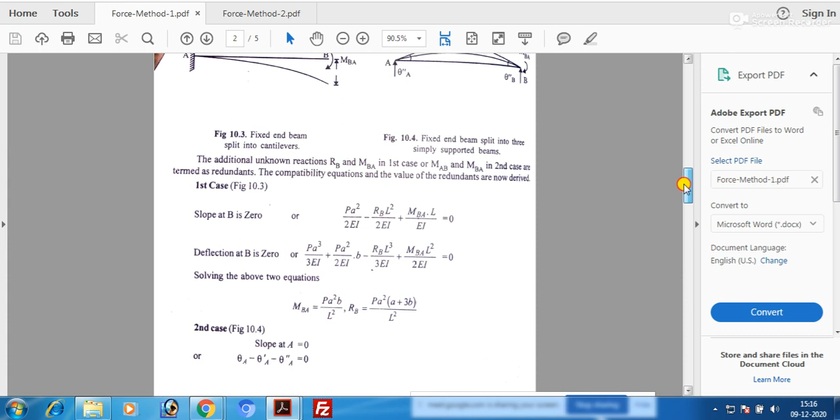So if you see this force method of analysis, force method 1.pdf, that is the first one. Please refer to this, page 459 - whatever you see here is not very clearly visible, it's not well scanned. I have given it in the next PDF, force method 2 PDF. This is the same one.

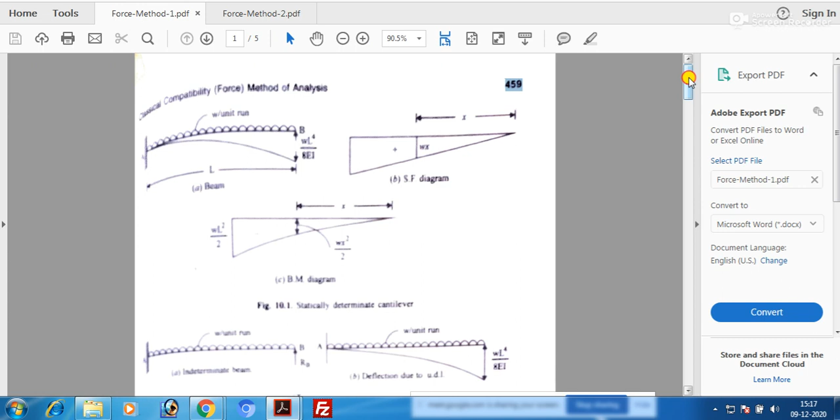So where should you start reading this PDF? Actually, you should first concentrate on this part - common beam displacements. You must remember these common beam displacements.

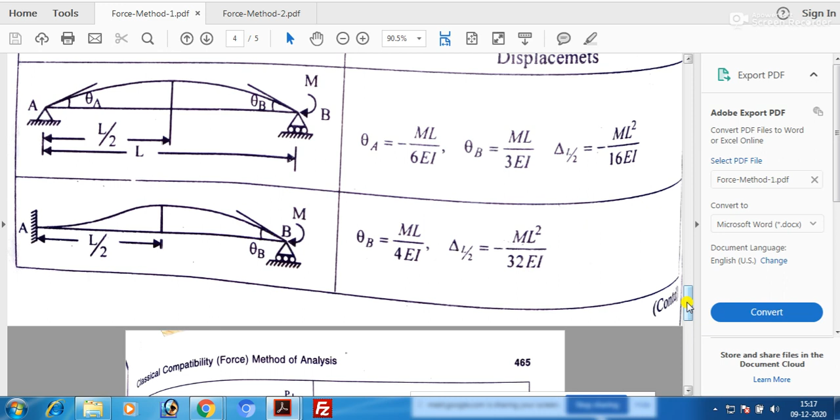So I have given you a chart from a book written by Roy and Chakrabarti. It's a very comprehensive kind of thing given in a tabular format. You should first try to see what is being said here.

So if you have a beam something like this, what kind of beam is this one? This is a simply supported beam. In a simply supported beam, at a particular end, if you provide a moment M, then what will be the rotation, what will be the angular rotation at support A and support B?

That you should remember, because in many cases you will be requiring it. So suppose you want to analyze a fixed beam, in that case you may be requiring these kind of values. You will have to remember what will be the displacement at a particular point of that beam because of this moment being applied, or external forces being applied.

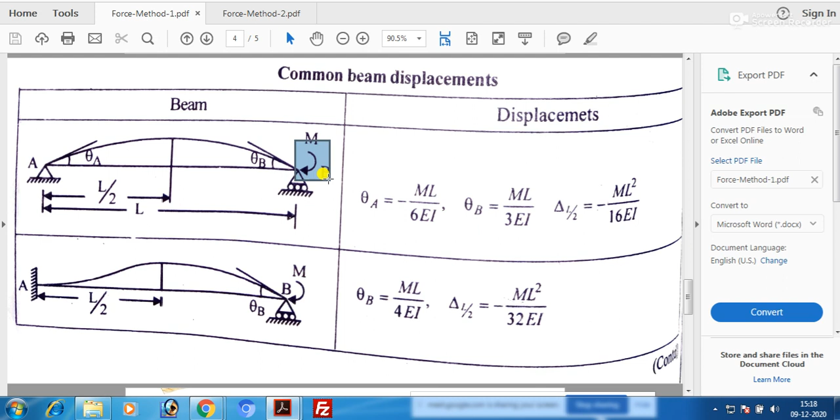So you see, this moment M, if you apply at point B, you are getting theta A equal to minus ML by 6EI, and theta B equal to ML by 3EI. You should understand this.

It is vice versa. That means suppose this moment you apply at A instead of B, then what will happen? In that case it will be just reverse. That means theta A will be ML by 3EI and theta B will be ML by 6EI.

Now the sign convention of theta A and theta B will all depend on you, how you are treating the rotation. If you think clockwise rotation should be positive, you put a positive sign. If you think anti-clockwise rotation should be positive, you put a positive sign. It's all up to you, but you will have to follow a completely similar convention throughout the problem. So either you take clockwise rotation as positive or anti-clockwise as positive, and either clockwise moment as positive or anti-clockwise as positive. It's all up to you.

Also you will have to find out the displacement at a particular or specific point. So when a moment is applied, at the middle of a simply supported beam, the moment diagram will be something like this. So at L by 2, this delta at L by 2, that is at the middle of the beam, is ML square by 16EI.

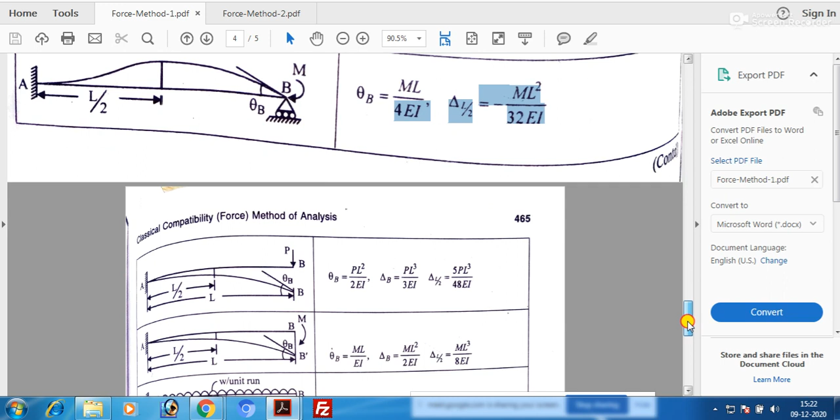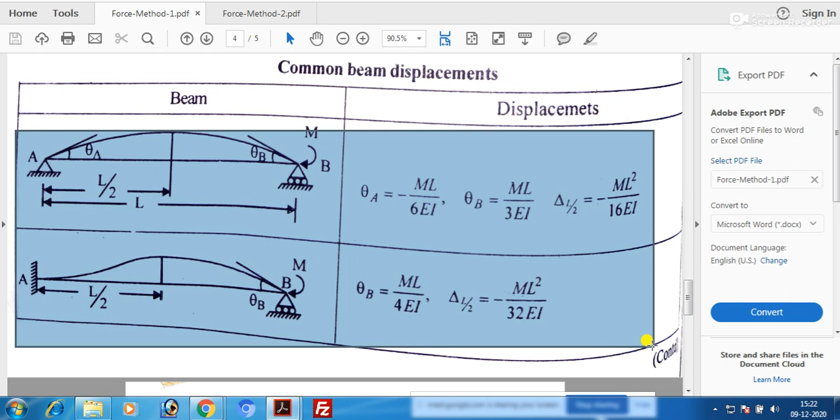Now these are very critical and typical cases. You must remember these values. In many cases you need these to be applied while solving the compatibility equations, or finding out the compatibility equation.

Now let us come to a very simple kind of structure. What is this? This is basically a cantilever beam. You must remember, if in a cantilever beam a P load is applied at the end, the displacement at the middle of the beam is 5 PL cube by 48EI. Displacement under the load, that is delta B, is PL cube by 3EI, and theta B is the rotation at B - there is no rotation at A.

So theta A will be also in this case equal to 0. And theta B will be equal to PL square by 2 EI.

So if you want to solve a problem of prop cantilever, as I was discussing in the previous class, you need to remember the cantilever displacements under different kinds of loads. When you take different kinds of loads, suppose a cantilever is subjected to a point load along with a uniformly distributed load and a moment, then what you will have to do is superimpose those. That means displacement due to a point load, displacement due to uniformly distributed load, and displacement due to moment need to be just added up to get the value of displacement at a particular point.

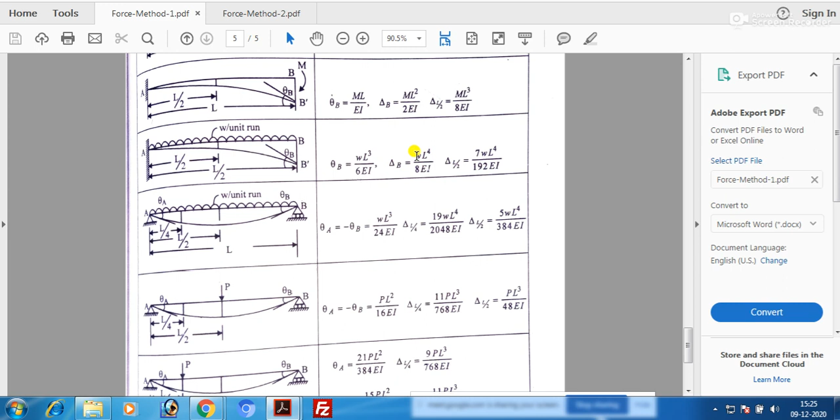Now if the cantilever beam is subjected to uniformly distributed load, W per unit run running along the beam, the value of delta B will be W, the load per unit run, into L to the power 4 by 8 EI. See the difference: when it is a point load, it is PL cube by 3 EI, whereas when it is uniformly distributed load, it is WL to the power 4 upon 8 EI.

At the middle, the deflection will be 7 WL to the power 4 by 192 EI, and theta B, the rotation, will be WL cube by 6 EI. All these values you should try to remember. In a single day you will not be able to remember it, but if you practice different kinds of problems, automatically you will be able to remember the values and correlate them among themselves, and you will be able to remember it very easily.

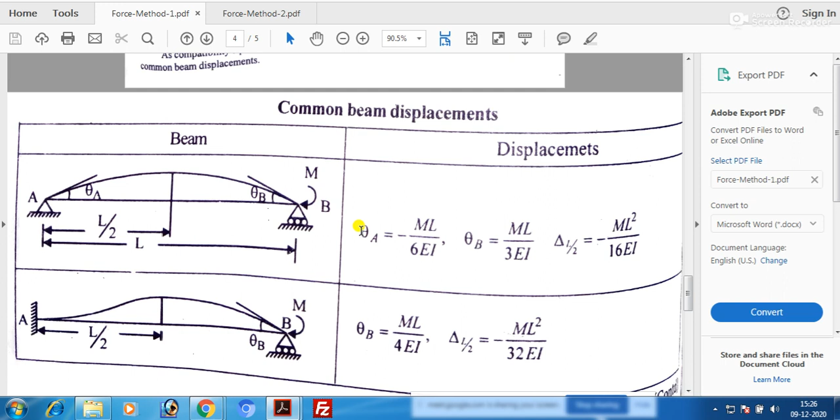Now this is a simple supported beam. What is the difference between the first one and the second one? In this case it is a simple supported beam, but it was being acted at one support by an external moment, so that is different from the previous one.

If you do not remember these values, I tell you that you will not be able to solve the compatibility method problems, because compatibility equations will be generated using these values of displacement. So displacement means either vertical displacement, horizontal displacement, or rotational displacement.

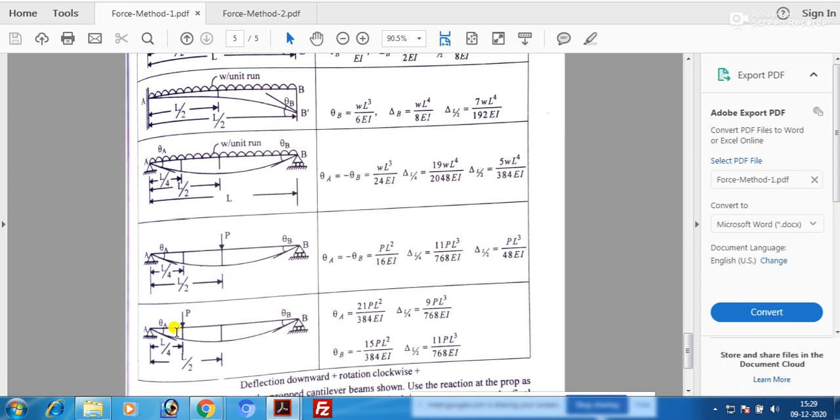Along with that, if you observe the other two cases, this one is a simply supported beam where a moment is being applied at the roller end, and this one is a kind of propped cantilever where a moment is being applied at the propped end.

So if you can remember all these values, you will be able to see that very easily you are forming the compatibility equation.

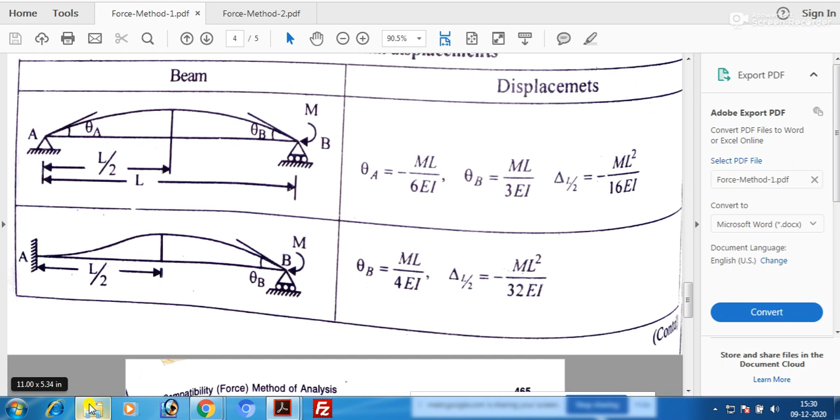So considering this guidance of these formulas, let us now try to see the step-by-step method of force method of analysis.

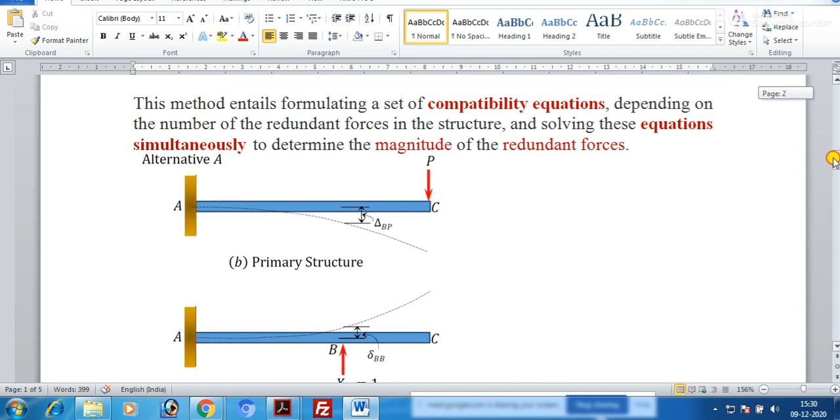If you see the step-by-step method, it is given something like this. First thing for analyzing any indeterminate structure using compatibility or force method, you will have to determine the degree of indeterminacy of the structure. So this is step 1.

After that, what do you have to do? Depending on the number of indeterminacy, it can be either external indeterminacy or internal indeterminacy. External indeterminacy means the reactions at the support—when we talk about reaction, it may be vertical reaction, horizontal reaction, or moment. So there are reactions, external reaction, and internal member forces.

So you find out first the indeterminacy, then you try to find out whether it is internally indeterminate or externally indeterminate. Depending on its indeterminacy, first you choose the redundants.

And what are the redundants? Redundants are nothing but the reactions which are unknown. That's what we have discussed, right?

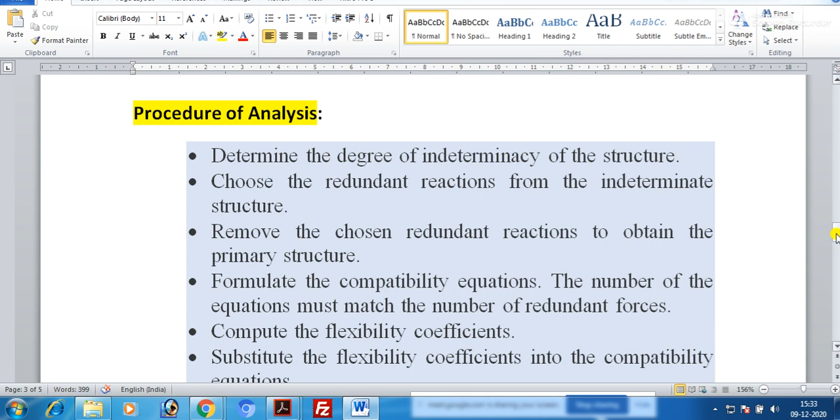So once you know your primary structure, what do you do? You subject your primary structure to different loads—the external load. Considering the external load, you find out the displacement at the point of the redundant.

Wherever point you have removed the redundant, at that point you try to find out the displacement, because of the external load which the structure is being subjected to. Now once you have done it with the external load, then you forget about the external load. Next, what do you do?

Take the primary structure again, and in that primary structure only apply the redundant forces. Applying the redundant forces at the same point, you try to find out the displacements. So the displacement at the point of the redundant forces should be equal to each other, because either they will not be moving or they will be rotating, or rotation will be equal to 0, something like that.

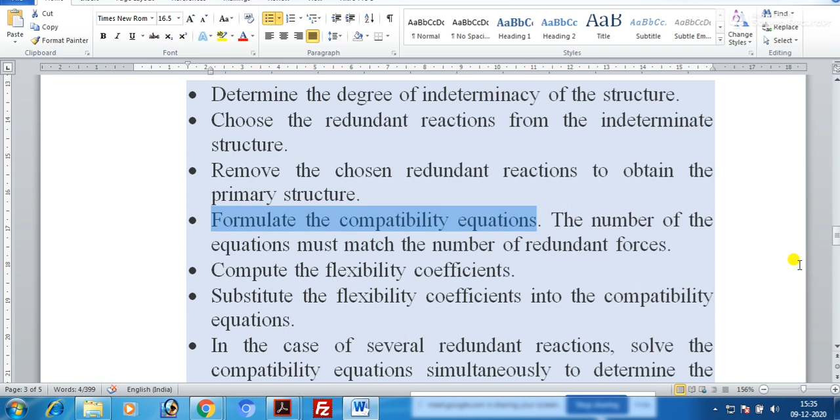That compatibility condition you will have to apply, and from that you should be able to formulate the compatibility equation. Once you have found out the compatibility equation, you should be able to find out the redundant forces from that. But you should remember that if you have one redundant in a structure, from one equation you should be able to find it very easily. But if you have multiple redundants in a structure, for each and every redundant you will have to formulate one compatibility equation.

So that compatibility equation, what you will be getting? You will actually be getting multiple simultaneous equations, and you will have to solve those simultaneous equations. One part of those equations will be called flexibility coefficients. So what is flexibility coefficient? If you remember solving simultaneous equations, you can easily solve using matrix method of analysis, or apply any method of analysis for solving simultaneous equations.

When it is 1 or 2 degree redundant, or 3 degree redundant, you can very easily use any method of finding it out. But if it is more than 3 degree redundant, more than 3 degree indeterminate, your number of redundant forces will be more, and your simultaneous equations will also be more. So in such cases, what will you have to do? You will have to formulate a matrix kind of equation, and then using matrix inversion technique you should solve the values of the redundant reactions.

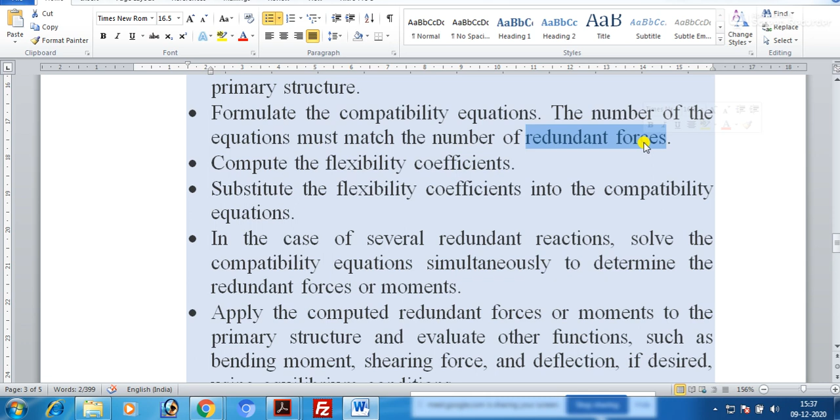So once you have got the redundant reactions, what will you have to do? In case of several redundant reactions, as I have explained, solve the compatibility equations simultaneously, and for solving these simultaneous equations you can use matrix equations and matrix method of analysis.

Once you have found out the redundant forces or moments, what you will do is apply the computed redundant forces or moments to the primary structure, because in the primary structure you have your original loads and you apply the redundant forces, since now you know the redundant force. So it is now known to you, and evaluate the other functions, meaning other reactions or other deflections such as bending moment, shearing force, deflection, whatever you want to find out.

Once you have found out your redundant, that means essentially the indeterminate structure has become a determinate structure. Once you have a determinate structure in your hand, you can apply equations of statics or equilibrium equations, that is sigma Fx equal to 0, sigma Fy equal to 0, sigma Mz equal to 0, and you can very easily solve for the other components of the structure.

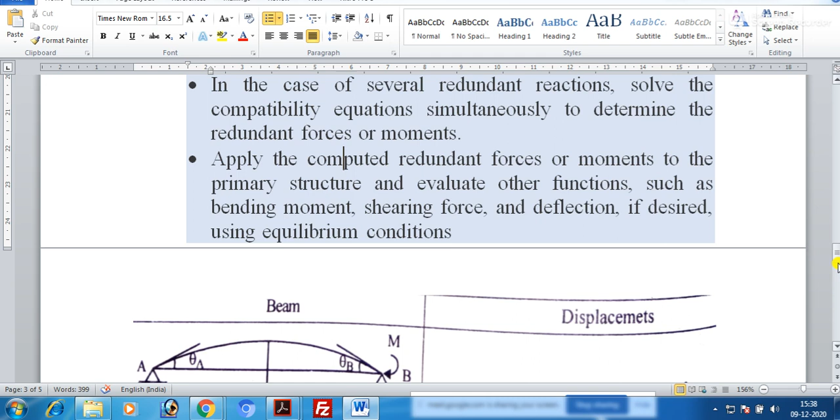Okay, so after understanding this method of analysis, we will take up one problem.

But before that, I ask you, is there any doubt up to this point? Tell me. Any doubt? No doubt?

No sir. Okay, so if you do not have doubt, then I just take one problem. See this one, so now you see this problem.

What is this? So you see, typically if you see this problem, this is a propped cantilever, right? This is a propped cantilever. I have taken this up previously also in the first class, where we discussed this propped cantilever analysis, how to find out the primary structure and other things.

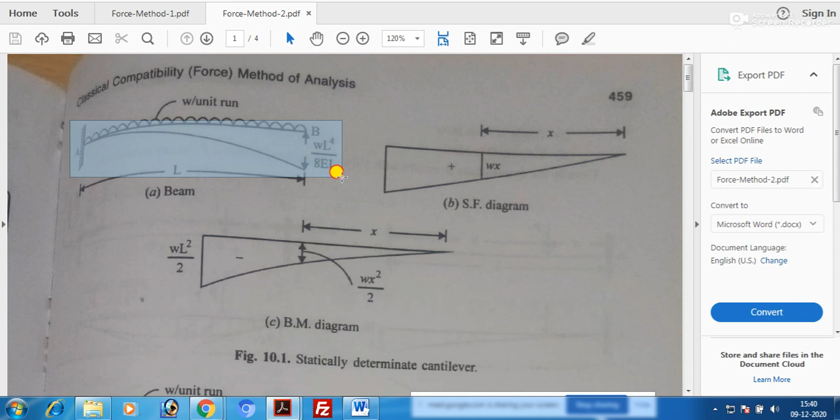If you take up this problem, you see this is typically, if you take this problem, what is this problem actually? Let's say this is your problem. In this problem you see a UDL is being acted on a propped cantilever. So once a UDL is acted on the propped cantilever of length L, then what will you have to do? If a UDL is acting on a propped cantilever, what will be your redundant?

First, before finding out the redundant, you must understand what is the first step. You must find out what will be the degree of indeterminacy, right? What will be the degree of indeterminacy? So you tell me now, what will be the degree of indeterminacy for this propped cantilever? Tell me, so if I take a propped cantilever, what will be the degree of indeterminacy? So what is a propped cantilever?

Indeterminacy will be 1. Where will it be? So how will you identify it?

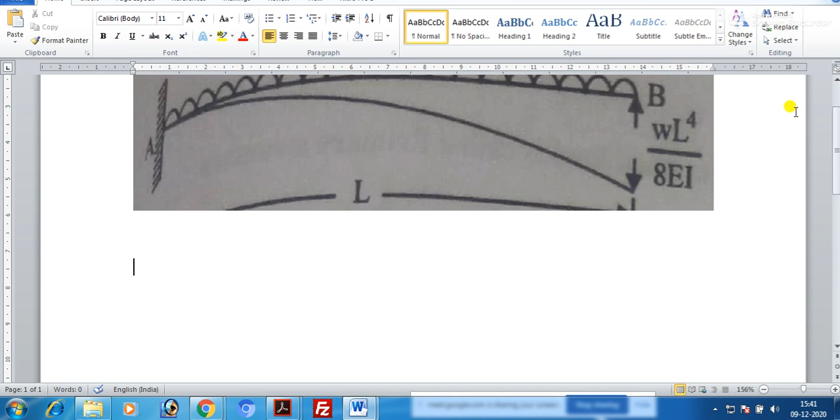See, there are two supports, one support is A, one support is B. At support A, what is it? It is a fixed support, right? So at the fixed support, how many reactions do you have? If you neglect the horizontal component of reactions, you have two reactions. So what are those two reactions?

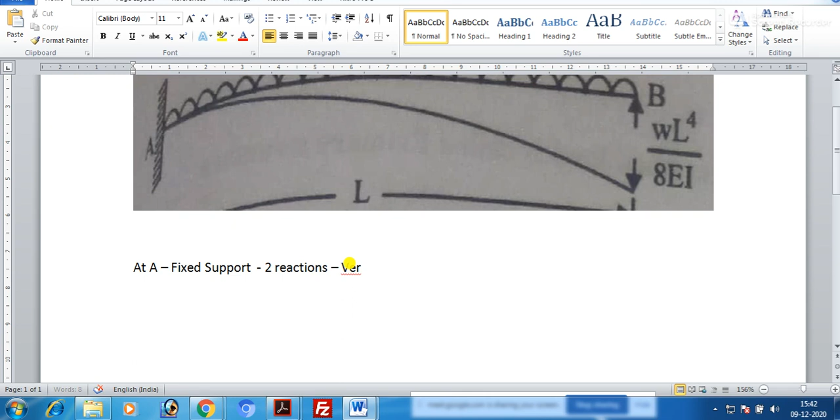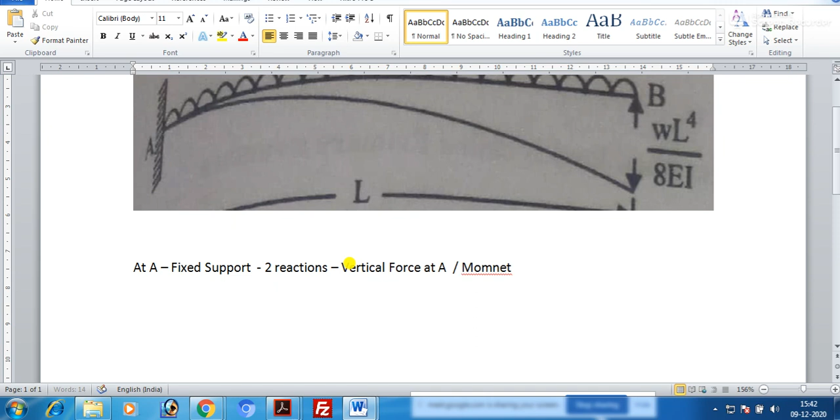One is vertical force at A, and the other one is Moment at A. So there are two reactions at A.

I am not considering the third one. Which one is the third one? Third one is the horizontal reaction at A. Why am I not considering it? Because this system is only subjected to a vertical force, that is W per unit run.

And what is the next thing? At B, what is the support? It is the prop end, right? At this point it is a prop end. So at B it is propped end. So when it is a propped end, which kind of support is there? Either it is a roller support or it may be a pin support. Both it can be, okay.

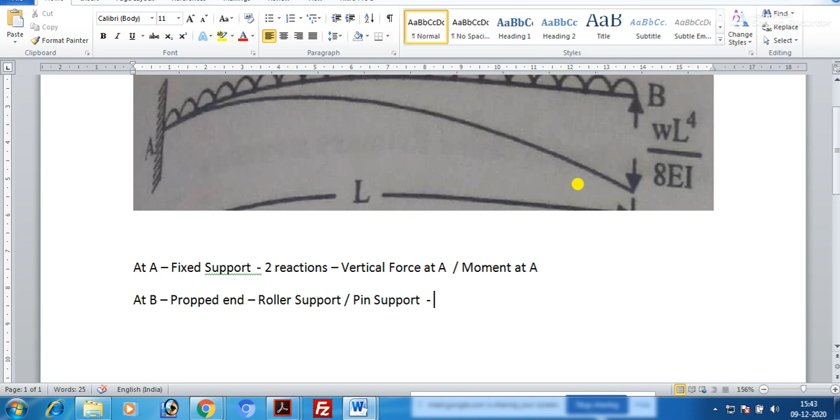So considering that there is no horizontal reaction happening, think about that because the system is acted upon only by vertical force. So which force will be coming in this case? The vertical force at B, correct? So how many unknowns do you have now?

So unknowns will be equal to two reactions here, and one reaction here, right? So 2 plus 1 is equal to 3. Now how many equations of equilibrium do you have?

Equation of equilibrium, don't confuse here. So in this case, equations of equilibrium we are having 2. Why? Because we have not considered the horizontal component of force. So the available equations from statics will be 2.

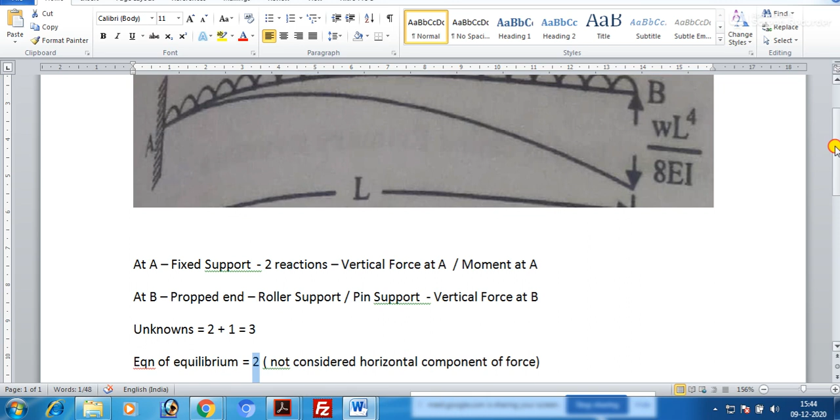What are they? Sigma Mz equal to 0, and summation of all forces in y direction equal to 0, that is sigma Fy equal to 0. So what will be degree of indeterminacy? So in this case, DOI will be 3 minus 2, which is equal to 1. So okay, fine, DOI is 1.

So the first step we have done. For analyzing a particular indeterminate structure using force method of analysis, first thing you will have to do is find out the degree of indeterminacy. So you have done it. Now the next step is to find out what is the redundant, right?

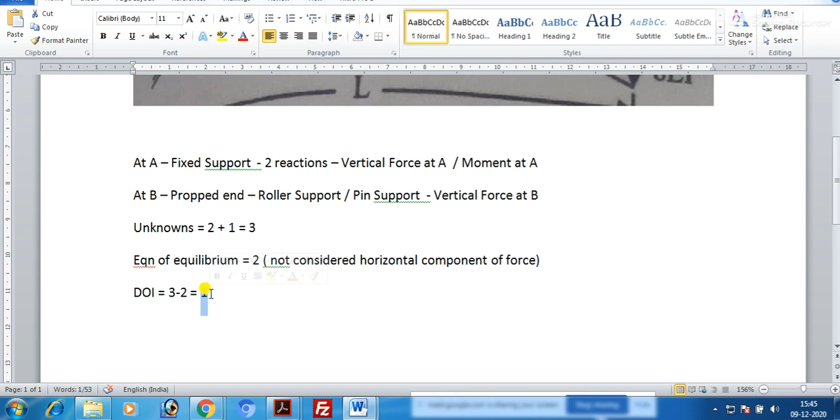So out of these forces, or out of this degree of indeterminacy, there is one redundant, right? Now you will have to choose the redundant properly. So once you choose your redundant properly, what is redundant?

Redundant means if you remove that force, the unknown force whatever you have in the structure, if you remove it, then what should be there? The structure should remain stable. So what can we do?

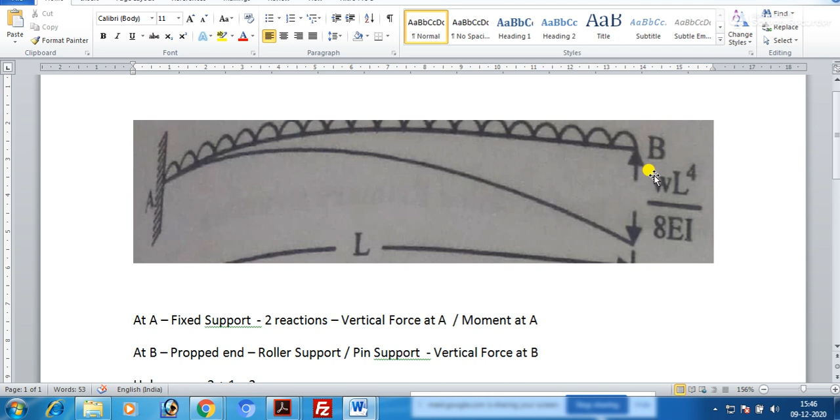If we remove this, that means if we remove the reaction at B from this structure, then what will happen? This propped cantilever will necessarily become a cantilever beam, right? And in that case it will become a cantilever beam.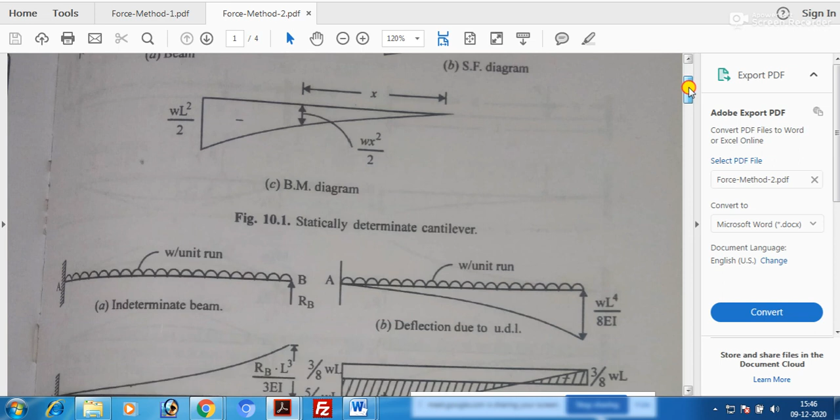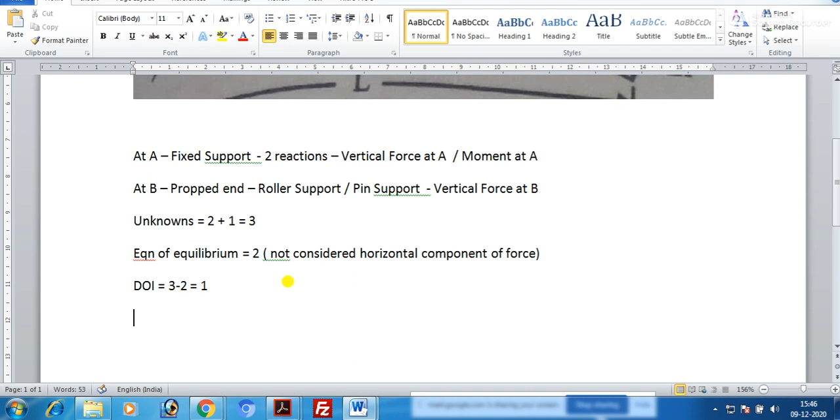So actually, you see, this one is an indeterminate beam. I'm again writing it from here. So you see, this is actually an indeterminate beam because this RB is over here. Now if I just remove this redundant, which one is redundant in this case? If I remove this RB, that is the redundant, then what will I get? I will get a primary structure, something like this.

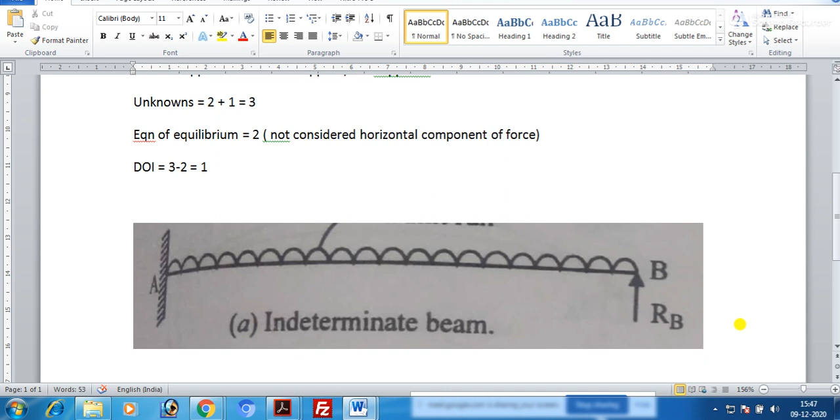So sorry, this is a cantilever beam. So actually what we are getting is purely... I think this figure will confuse you. Just a minute, let me adjust it a little bit.

Now it should be clear. You see, there is no reaction at this point. So what we have done is we have removed this redundant. And what is this redundant? This redundant in this case is RB.

Now if I remove this, you see this structure necessarily remains a stable structure, and this is necessarily a cantilever beam. This structure we will call the primary structure. So we have removed the redundant, and we have seen what is the primary structure.

Now after this, what is the third step? Second step is also done. Now after you have your primary structure, what will you have to do? So at the point of the redundant - what is the point of redundant over here? Redundant point is over here.

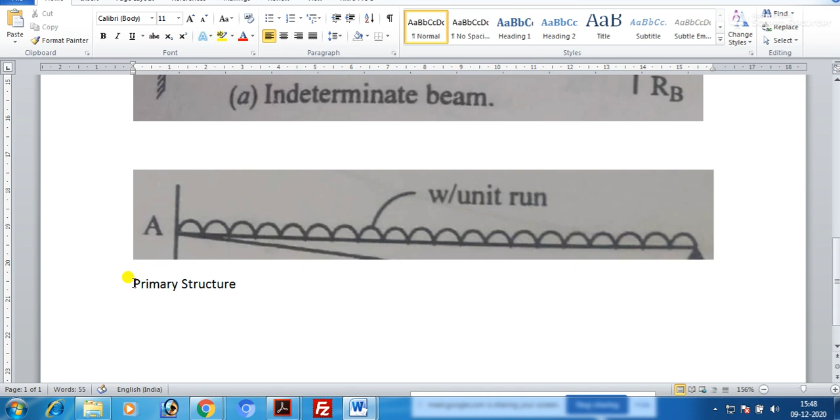So at the point of the redundant, you find out displacement in the primary structure, at B. And what is B? B is the position of the redundant. So at the position of the redundant, you now have to find out what is the displacement.

Now you tell me, what will be the displacement at this point? Can anyone tell? WL cube by 3EI, WL cube by 3EI.

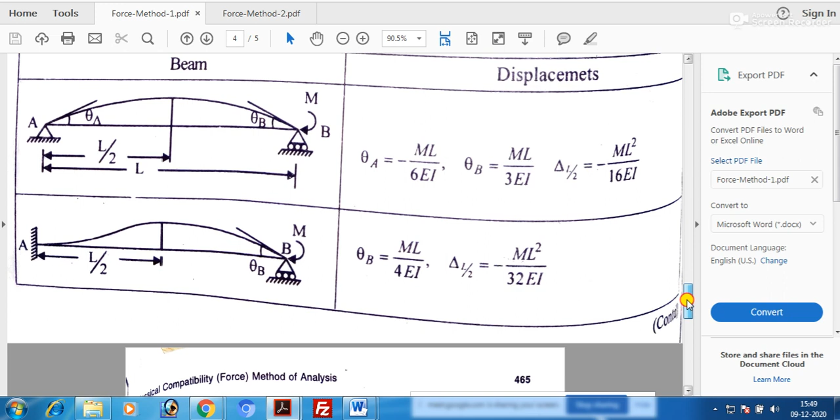Okay, let's see - that is where you will be requiring this diagram. You see, now what are you having? You are having a cantilever beam subjected to uniformly distributed load, and at point B you will have to find out the displacement. So the value you said is not correct.

WL cube by 3EI is the case when a cantilever beam is subjected to a point load at the end. When it is subjected to UDL, it is not WL cube by 3EI, it is WL to the power 4 upon 8EI. Okay, WL to the power 4 upon 8EI.

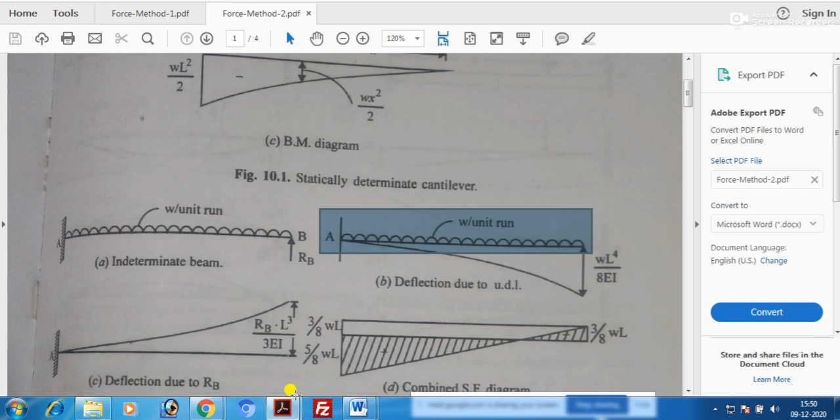Okay, so what will be the displacement? Let us write over here. So delta, I am writing it like this - delta B. So delta B will be equal to how much? So what should I write? W... WL to the power 4 by 8EI. You see this value - WL to the power 4 by 8EI.

Now you understand how these diagrams are important, how this chart is important. So all these values you should remember. I will take up problems one by one and you will understand why you should remember all these values.

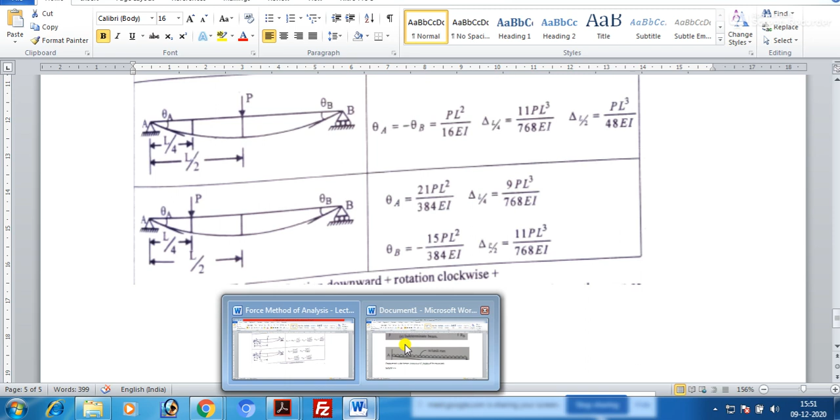Okay, so for this first problem, you need to remember this, and you will get the value WL to the power 4 upon 8EI. What is E and what is I? E is the modulus of elasticity and I is the moment of inertia of the beam. So EI is basically called flexural rigidity, right?

So you have seen what is delta B. Now what is this delta B? Delta B is nothing but the displacement at B due to this load, the external load acting on the structure.

Now you see, in the next case what will happen? When you take this load out from the structure, as I was telling you, if you just consider only the structure subjected to a point load over here, what is the point load in this case?

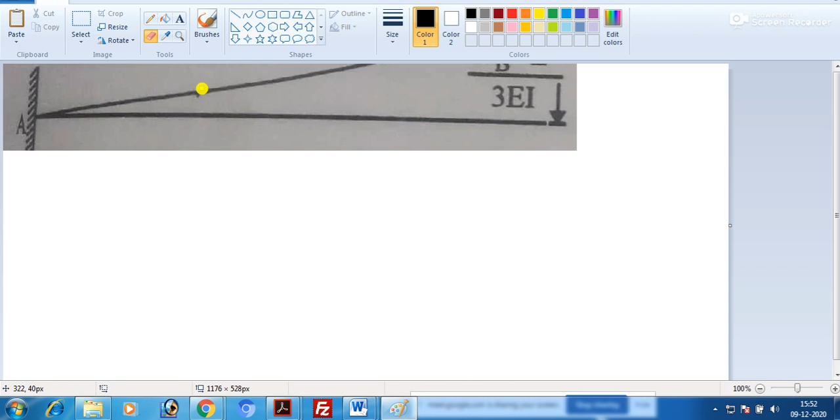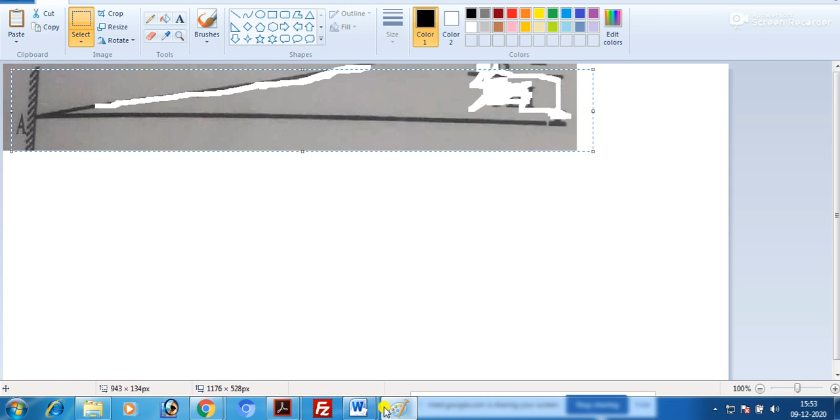So suppose I take the structure - rather I'll just take a paint and do it, otherwise it will be confusing. Let me remove this first. So just take it and remove it. Also remove this. So if I remove everything, what you are basically getting is a cantilever beam. So forget about all these loads, okay.

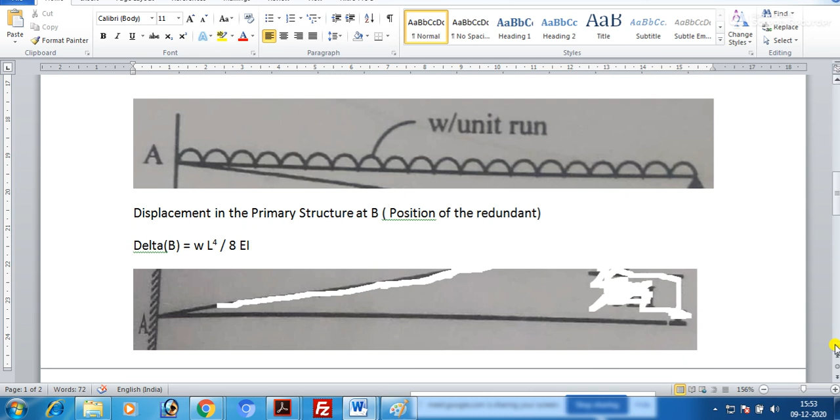Now in this beam, what will be the next step? In this beam, you should be applying your redundant force. So what is your redundant force over here? This is your redundant force, okay. So at the end, if you apply your redundant force - let me change the color.

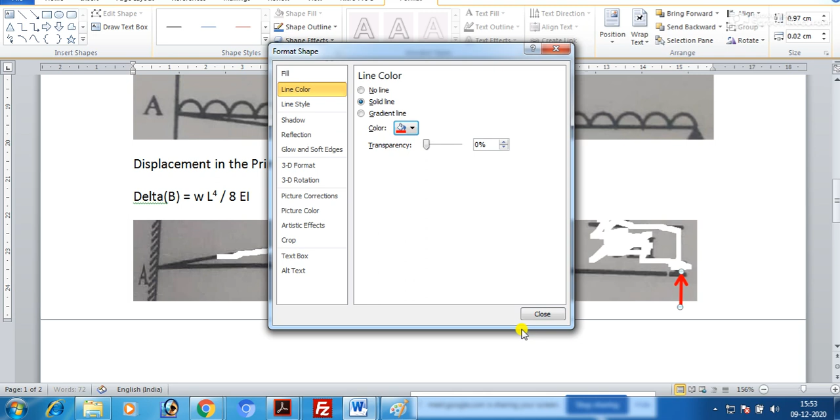So if you apply the redundant force, what is this redundant force? It is nothing but the reaction at B at the prop end. Because of this redundant, suppose its value is RB. RB is nothing but a point load acting on a cantilever from the below end. So what will it do? It will just displace the structure in the upward direction.

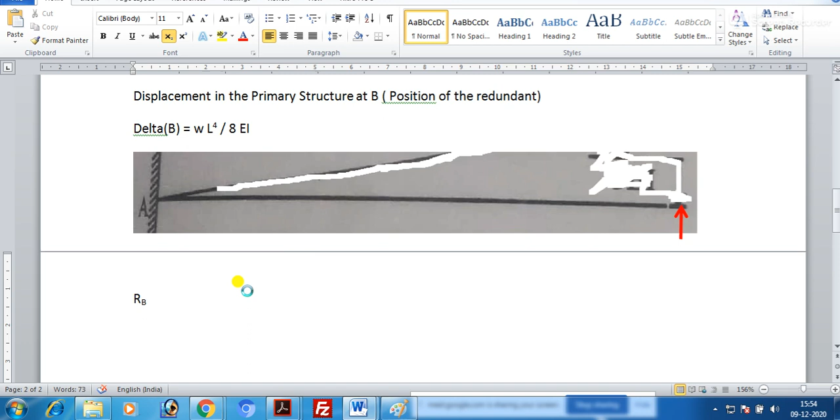So you will find a deflection of the structure similar to this kind, a displacement similar to this. Let me draw it again here. Because of this RB, when it is applied, it will deflect the structure upward. And what will be the displacement?

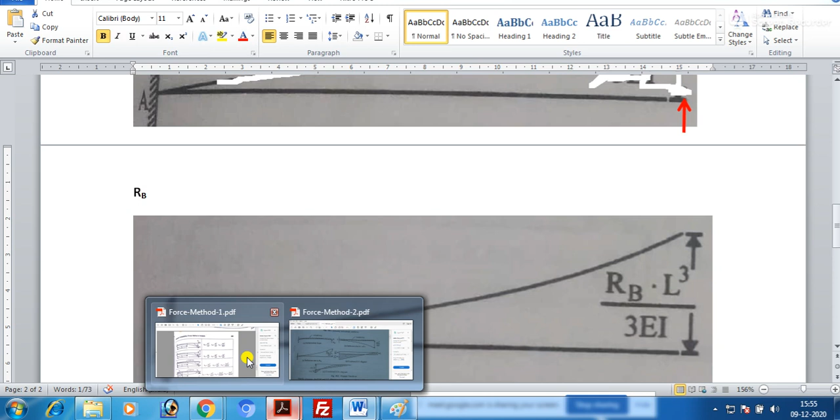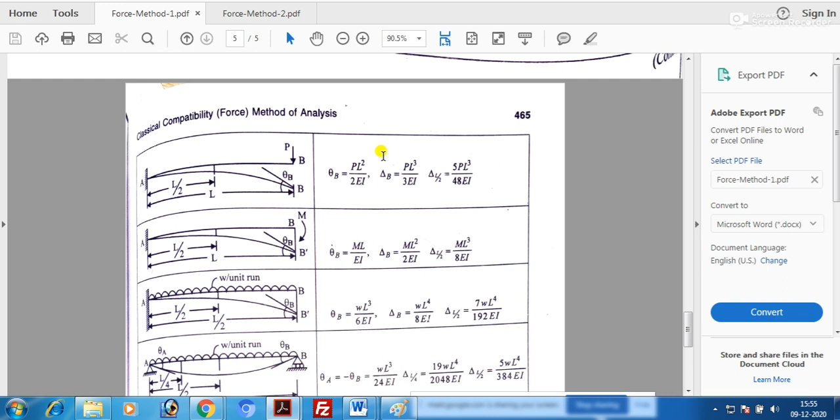Now again you will have to go back to here. Someone has told that delta B, because of this P, is PL cube by 3EI. So because of this RB, now we will be getting a displacement over here, that is RB into L cube by 3EI. In this case, this P is being replaced with RB, isn't it?

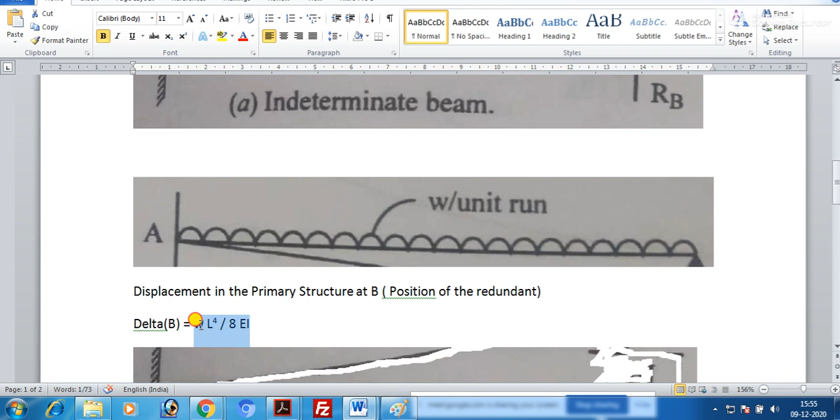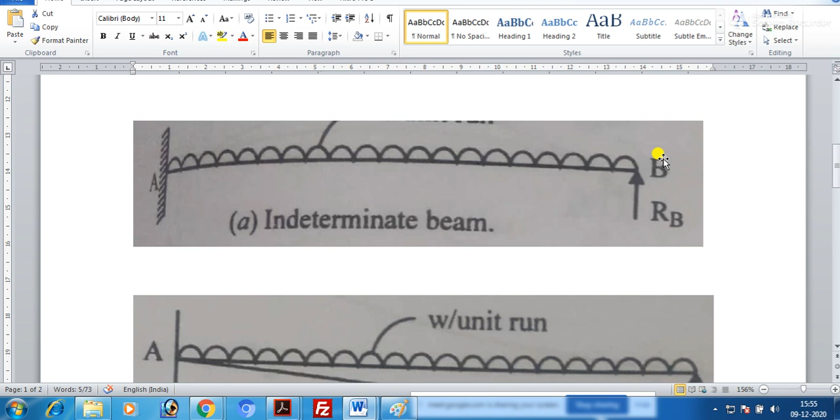So now, from these two conditions, once you have got this delta B, at this prop end ideally there will not be any displacement. Ideally it should not be any displacement. That means the downward displacement should be equal to the upward displacement. So what can I write?

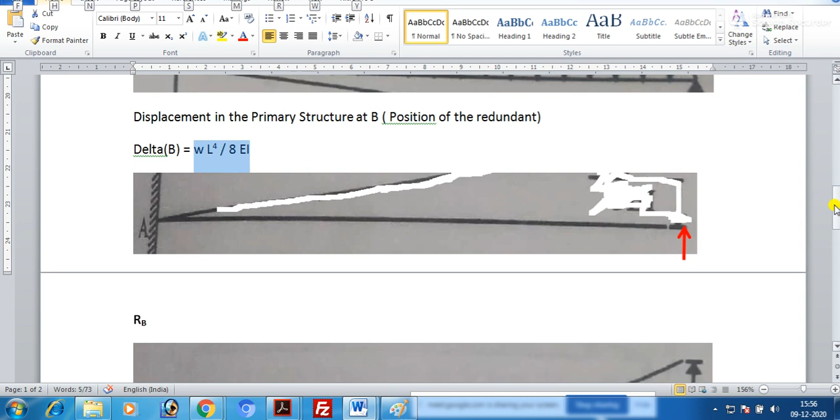I can write it, let me take it from the top. So what I can write, I can write this one, right?

This is downward. If I take this displacement as positive, then this displacement which is upward, I can take it as negative. So this minus RB into L cube divided by 3EI, this should be equal to how much?

Tell me, how much should the value be equal to? Zero, sir. Zero, yes, absolutely. It will be zero because at the point of the prop end, the upward deflection due to the redundant on the primary structure, and the downward deflection due to the external load on the primary structure, should be the same.

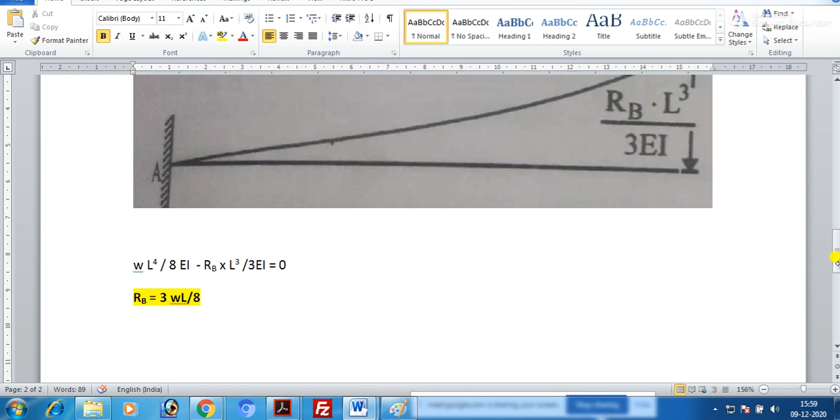Yes sir. So once you find out this RB, you can take the cantilever beam and find out, because of the UDL, what is the bending moment. In a cantilever beam, when a W load is acting on the beam, the moment at the fixed end is WL squared by 2, right?

Now, because of this 3WL upon 8, what will be the moment? There will be a moment of 3WL upon 8, multiplied by L, because at the fixed support, this load RB is acting at this point. So if I take, now you see I go up, this is your RB.

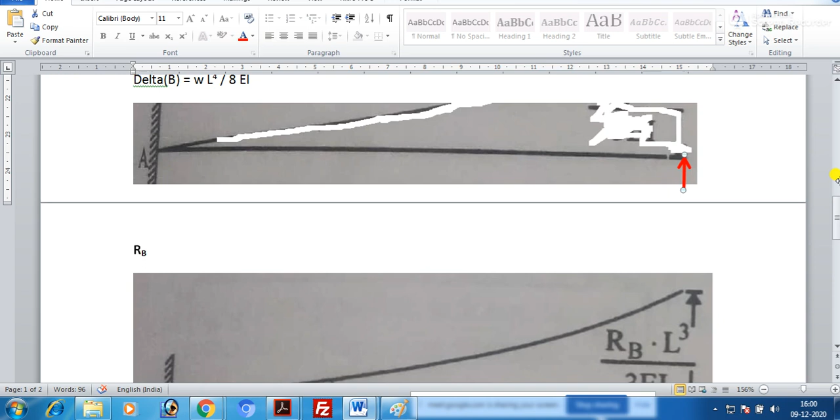Now you know your RB. So because of this RB, how much moment will come at A? Because of RB, this is RB into L. Now RB is known, so what is RB? RB is nothing but 3WL by 8. So 3WL by 8 into L, which will give you 3WL squared.

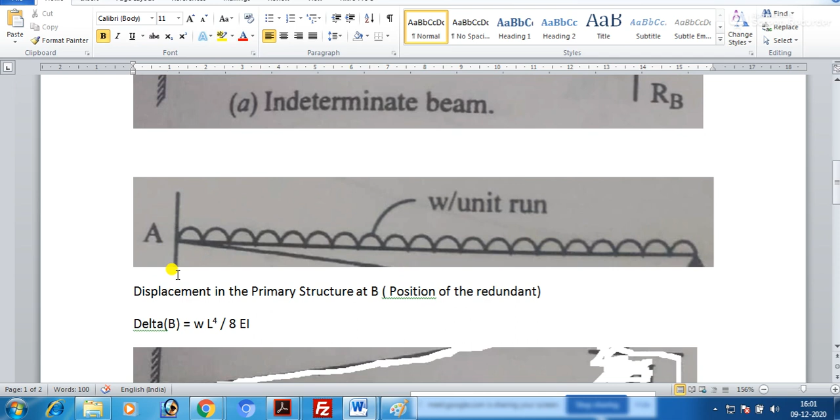3WL squared divided by 8. Now you see, because of this uniformly distributed load, when you just consider this cantilever beam, this will try to rotate this point in this direction, whereas when you consider this, it will try to rotate in the reverse direction. So obviously the sense of these two, that means WL square by 2 which is because of the UDL, and 3WL square by 8, will be different, right?

So what you can do at A, if you want to find out the moment at A, how much will be the moment? You can easily do WL square upon 2 minus 3WL squared upon 8. So if you solve it, how much will you get?

Sorry, how much will you get? Tell me. Three WL square upon 8? WL square upon 8, sir. WL square upon 8, right? WL square upon 8, okay. So WL squared, sorry, WL squared upon 8.

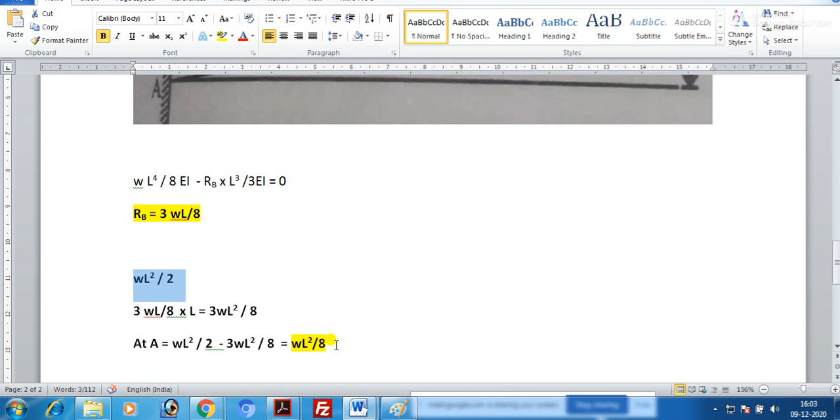So this is actually your moment at A. Now you see, because of the cantilever, being only a cantilever, you had moment WL square by 2. Now you see, by giving a prop end, just adding a roller support at the end, you have reduced the moment to WL square by 8. So that means how much have you reduced? Almost 1/4, right? 1/4 of the moment has been reduced at this support.

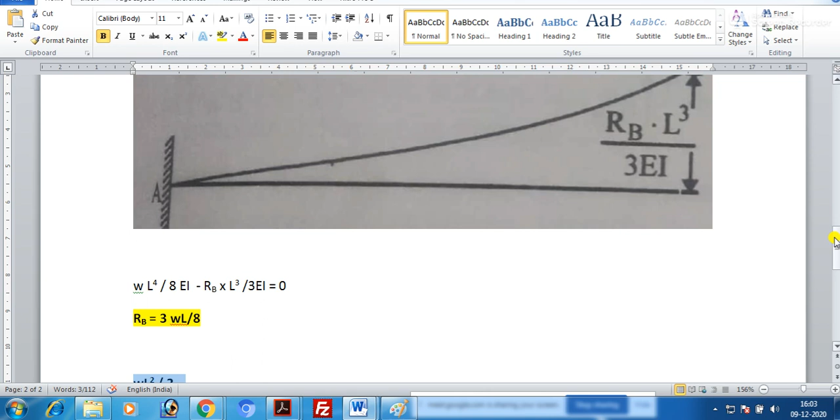So what you can do is make your support, whatever you are preparing or constructing over here, a little bit, about 1/4, less strong than whatever you would need only for the cantilever, and that is the benefit of indeterminacy. Now you can see.